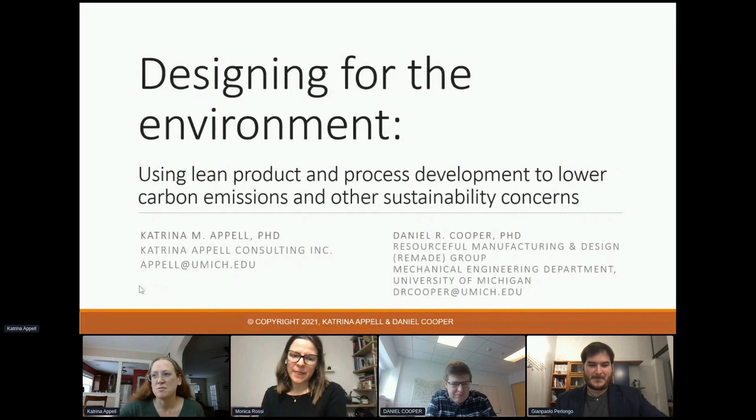To begin, let's look at the role of manufacturing and production when it comes to environmental impacts. So focusing on the biggest global issue of today, climate change and greenhouse gas emissions, these pie charts show the contribution of different sectors to global annual carbon dioxide emissions. The pie chart on the left here shows that emissions can be split roughly one third between buildings, transport, and industry. So a third of emissions coming from making stuff and 2/3 coming from using the stuff, the products that we have made in industry.

Taking that industry segment, which is huge, it's a third of the pie, and expanding it out to the pie chart on the right-hand side, we can see that metal manufacturing, for example, accounts for around 10% of global industry emissions. So that's taking metal material that's already been made and converting it into products. But that pie chart on the right-hand side also shows that over 50% of industry emissions come from making just 5 key materials: steel, cement, paper, plastic, and aluminum. What does this mean for manufacturing? If you could click on, please, Katrina.

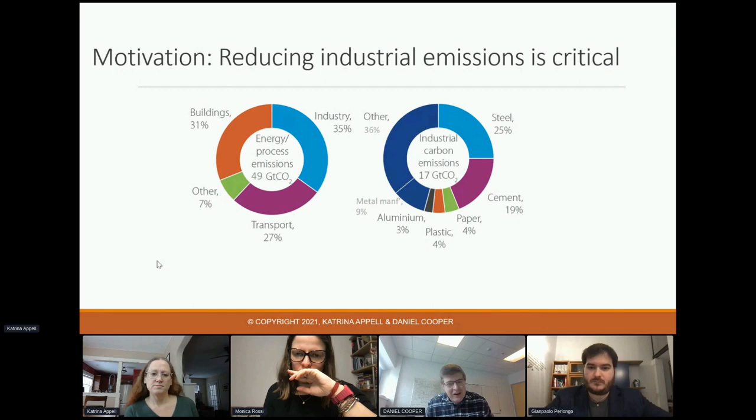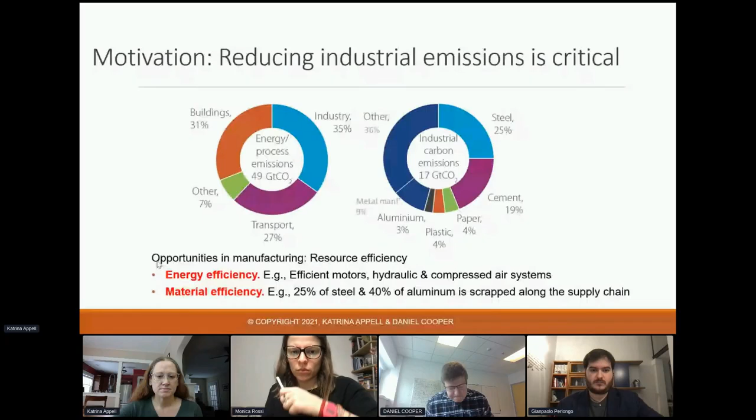Well, there are certainly opportunities to improve energy efficiency in manufacturing, and they are worth pursuing. As we can see, energy in metal manufacturing alone accounts for 10% of industry requirements. But we also need to work on improving our material efficiency. We are already incredibly efficient in how we make these key engineering materials, and we are approaching thermodynamic efficiency limits in many cases. So if we want to drastically cut emissions, we are going to have to get a lot more efficient at how we use the materials that we produce, and there's certainly scope for improvement there. So for example, around 25% of all the steel we make and 40% of all the aluminum we make globally is scrapped along the manufacturing supply chain before reaching a product and ultimately use with a customer. You can click on, please.

So what's the role of engineering design in all this? Well, just as with product lifecycle costs, it is the decisions made during the design stage that have a lasting impact on the energy requirements and emissions released from production, and also the environmental impacts of using and then disposing of the product. So, for example, design determines the potential for component reuse, product remanufacturing, and material recycling at product end of life.

Now, traditionally, it's the use phase, when we are operating the product, for example, driving our car, where most of the emissions and the environmental impacts occur. But the efficiency of many products in that use phase has been improving dramatically in recent years. And that increases both the relative and absolute importance of production and manufacturing emissions, because these use phase efficiency improvements are often bought, if you like, at the expense of more emissions intensive production.

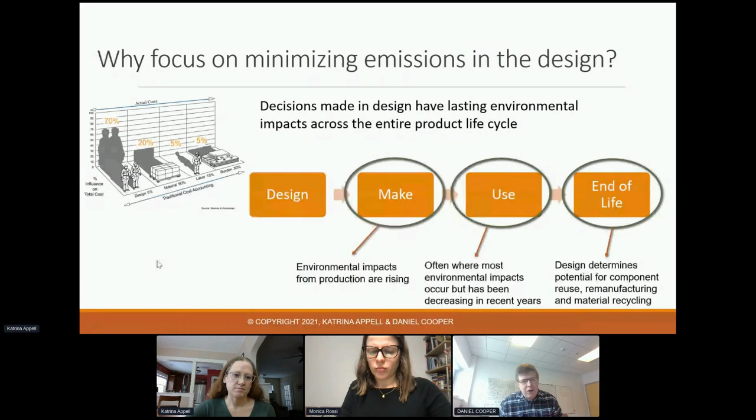So just taking, for example, an electric car or a vehicle with a lightweight aluminum or composite body, that's much more emissions intensive to produce than a traditional mild steel internal combustion engine alternative.

Next slide, please. So designers need to increasingly consider the ramifications of their designs on energy and material efficiency in manufacturing. This is a flowchart adapted from Horton and Allwood, who are focusing on the automotive industry, and highlights that material efficiency is considered to some extent within manufacturing after the product design has already been set. And at that point, there's very limited scope for improvement.

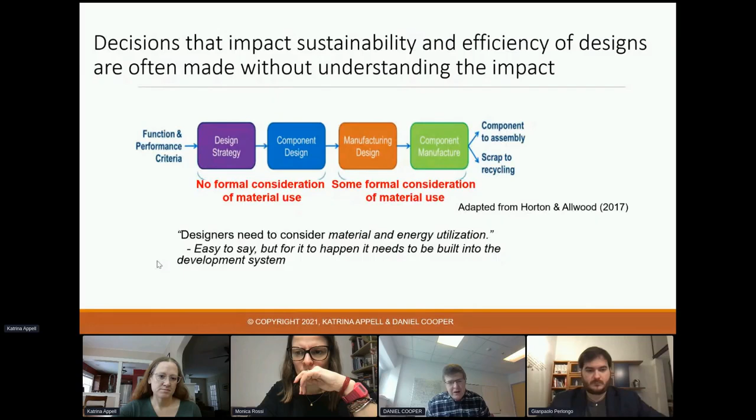But in that design stage, there is actually very little, if any, formal consideration of material efficiency. And this is the same across many different industries, not just automotive. Next slide, please.

So what can we do? Well, there are many eco-design tools available, and many of these are in the form of checklists, life cycle assessment tools, function deployment tools. And most of these tools, though, do not emphasize that important link between design decisions and manufacturing constraints and the environmental impact from manufacturing.

And so in this presentation, we are really going to echo the recommendations of Sutherland et al. in their recent paper on industrial sustainability, and emphasize the need to exercise systems thinking across the product lifecycle to anticipate and avoid creating environmental problems by addressing and eliminating the root cause of these problems at their source.

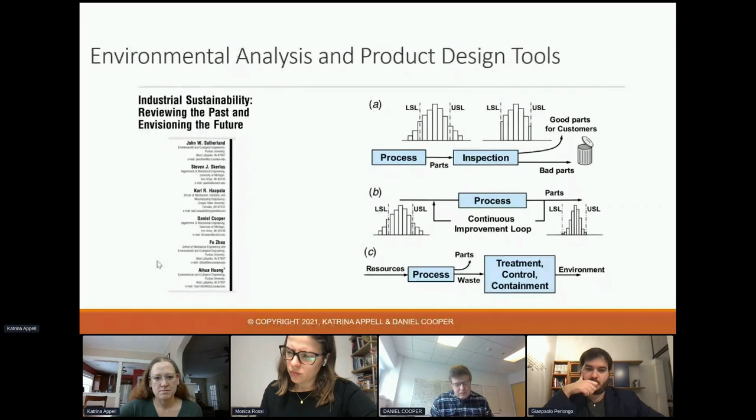And this is really a call to follow the teaching of Edwards Deming with a process control-like approach to modify or replace industrial processes to consume fewer resources and produce fewer wastes. And so building off of that approach of following Deming's teaching, that paper emphasized following one of his principles, but all 14 of his principles really fit together.

And building off of that is where Toyota started a lot of their learning on LPPD. And in the decades of research that have been done on LPPD since, we've now distilled down to these 6 principles that Jim Morgan introduced earlier today. These are the current guiding principles that we're focusing on, that a lot of the research is built to.

And so that really is that focusing on putting people first. It's the people that bring the heart and soul to development, and they're the ones ultimately making the decisions and do all the work to design products and design the manufacturing systems that we want to make as efficient as possible.

Understanding before executing. If we understand upfront what the product needs to be, we can then execute with speed and precision. Also understanding upfront what that total life cycle impact for sustainability is. Too often those decisions are made without understanding fully.

Synchronizing workflow. So if we understand how our work fits together, we can get the right knowledge at the right time to the people making those decisions that are going to impact the ultimate sustainability of the system. Developing products is a team sport. No product is ever developed in isolation. It's a team that works together. And so how can we create the systems and structure to enable teams to be effective working together?

Build in learning and knowledge reuse. So first of all, how can we learn as fast as possible? But then the real competitive advantage is how do we not relearn on every project and capture that knowledge? How do we capture the sustainable methods we're using on this project and use them on future projects?

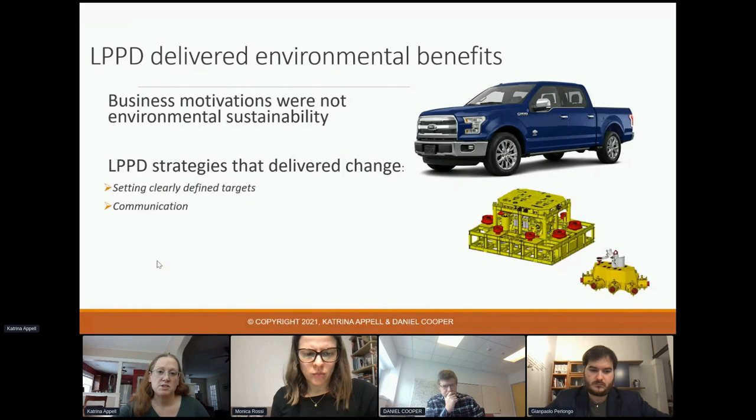And so both of these case examples used LPPD and some of the strategies they used to deliver that change, including setting really clearly defined targets, having really good communication using Obeyas, which was pretty consistent across both organizations, and having very deep collaboration with supply chain. In the case of the F-150, being able to make sure that they could recycle the aluminum in how they've set up the entire system was really key. With the supply chain, both focused on optimal standard architectures. In the case of the F-150, really focusing on that fixed and flexible approach, only really innovating the stuff that the customers would see, but then having a lot of the inner body panels be fixed, with optimal material utilization with the infrastructure.

In the case of the TechnipFMC Subsea 2.0, the entire program was focused around having standard architecture, and so that led to them being able to really focus on making things smaller with better material utilization, really having technical excellence to deliver these engineering challenges, and how they educated people on these principles, and then how they effectively managed trade-offs, because there's always going to be trade-offs. And so what it really comes down to is how do you set yourself up for success early in the project to be able to manage those trade-offs and work effectively together as a team.

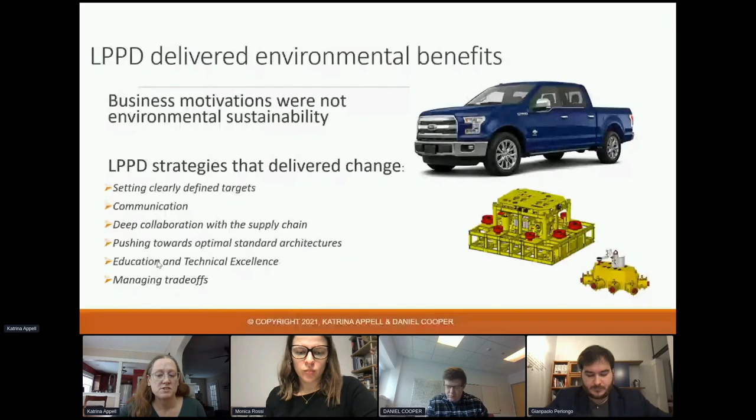So based on these initial case study findings, we hosted a workshop at the AME conference in Chicago two years ago in 2019. And that was attended by around 26 different industry representatives. And after presenting on these case studies, the attendees split up into small groups and answered questions around: what are the environmental impacts in your manufacturing operations? What are the opportunities to improve the environmental impact and improve your bottom line? And how can lean product and process development potentially help to deliver these benefits?

And so what we found in that session is that participants in upstream industry, for example oil and gas and material production, glass manufacturing, identified energy waste and energy efficiency as primary targets for reduced greenhouse gas emissions. So, for example, reduced flaring, and heat recovery from furnaces used in material production. Whereas downstream manufacturers, essentially after the material had already been made, really identified material savings, recycling and remanufacturing as the primary opportunities for significant environmental benefits.

Several of the companies, for example an oil and gas company at the workshop, not TechnipFMC in this case, reported that their projects were unnecessarily bespoke, which perhaps is not immediately intuitive, but because they were unnecessarily customized, it meant that the company actually had very little time to develop optimized energy and material efficiency designs. So there is greater potential for greater standardization and only changing where the greatest value is being provided.

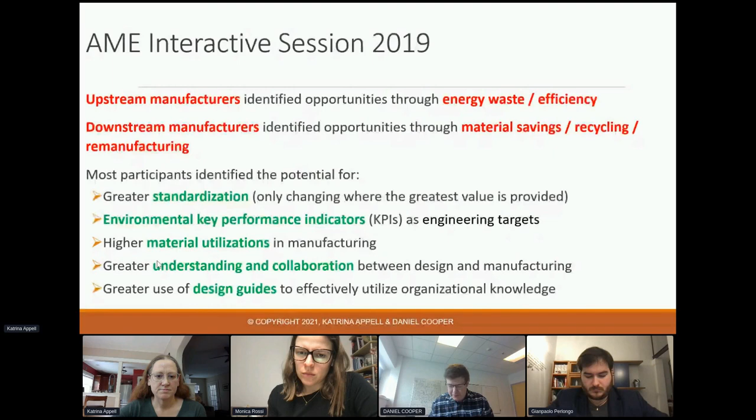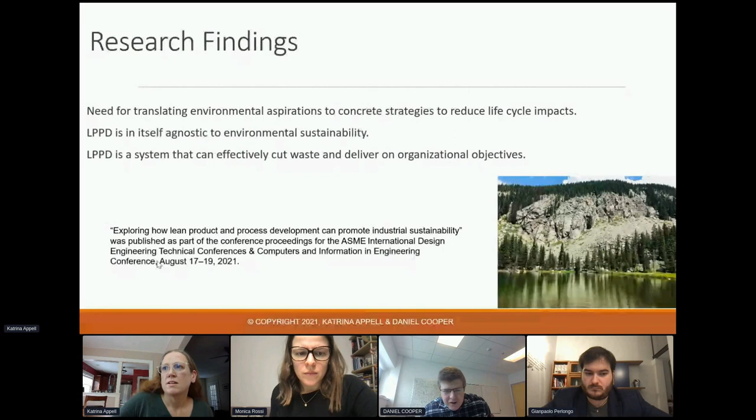Nicola is asking, how could we account or measure the impact on sustainability during the LPPD? How can I then spread it during its useful life? I think, Katrina, is that essentially what you're about to address? I think so. I'd say that this is probably the best slide to answer that question, if I'm understanding the question right, is that you really want to look at the entire life cycle across the product. And so that is across its use phase.

So with the LPPD principles, it's the decisions we make in design that are going to ultimately impact so much of the sustainability across that life cycle. And so that really starts with understanding, with a life cycle assessment, to understand that use phase, understand the end of use, understand the make phase. And then from that, we can use our knowledge of that understanding when we execute the development, being conscious of those impacts and making decisions that have lower emissions or other sustainability concerns.

Upfront in design, because there's so many things that, once the design's been made, it's not easy to go back and change. If you've designed in really high carbon emissions, there are some things you can do to lower it after the fact, but ultimately a lot of those are baked in and you can't reduce them until you redesign the product on the next design. And so really focusing on understanding the impact up front so that you're making decisions that impact across the life cycle.

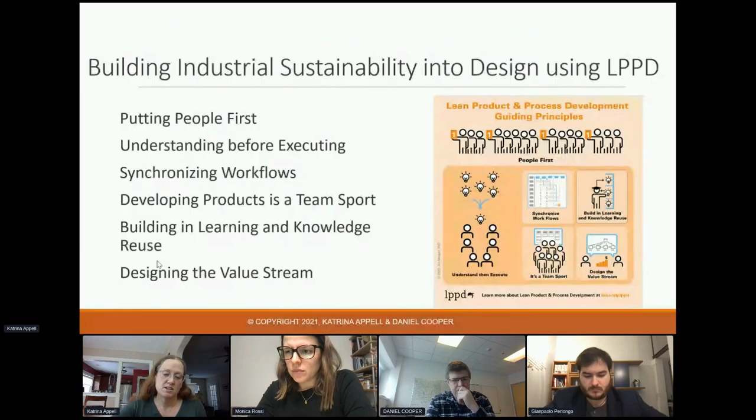Great. Well, I think I'll hand back over to Katrina. I think now you are really going to talk in more detail about how to use LPPD to translate environmental aspirations into strategies. So I'll hand over to you, Katrina. Thank you, Dan. And so just focus on these guiding principles. So there's lots of tools that can be used, as Dan noted, but we really want to focus on looking at LPPD as a holistic system. What are the things that we can do to create the conditions to design for sustainability across that entire life cycle? And we'll fit those tools in as we think about all of these guiding principles.

And so that first one is really putting people first. A key part here is that you get better performance when you put people first. So Daniel Pink summarized decades of research on human behavior and the results. And basically, to get the best performance from people, they need to be intrinsically motivated, which is great because it's also more rewarding for them. So it's a win-win for the individual and for the business. And this is a lot of the intent when we talk about putting people first, we want to create the conditions to enable people to perform their best and be satisfied.

So the three things people need are purpose, autonomy, and mastery. Purpose is really, what is the value of my work? Autonomy is having some control over your work, and mastery is about how you improve your skills. And Lean can deliver on all of these if we're conscious about it. So as we talk about the other principles, and anytime you're thinking about any Lean practice, whether it's to promote sustainability or otherwise, just think about how does that enable people? Because you need to be thinking consciously about the people aspects of any Lean practice or principle and how you're enabling that.

So for the purpose, you can really deliver by helping people see how their work fits together to help the organization. For sustainability experts, creating a system that enables their expertise to get used up front and understood throughout the design and the development is going to help provide purpose to them. Creating the conditions to have that knowledge on how to design things that are more sustainable for everyone on the team is going to be helpful for their purpose.

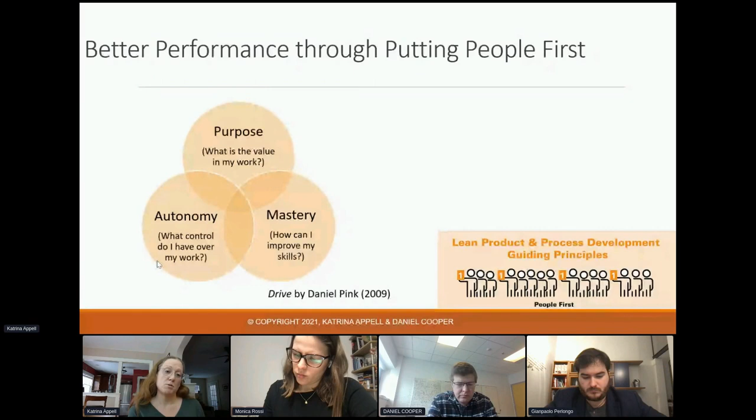And then the understanding before you execute. So some of this is understanding what those impacts are and what the decisions are that have the different sustainability impacts, but then also making sure that as we're defining what the product is, that's done cross-functionally in the study phase of development before we execute, and then capturing that in the concept paper to really deliver as the vision and the aligning document for the development. We just want to make sure that sustainability is part of those upfront conversations.

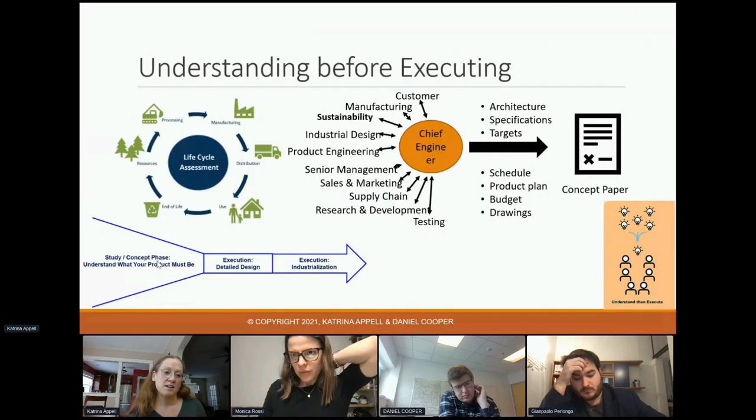There are sustainability experts within a lot of organizations, and they just often aren't involved as early in design as they should be to have the biggest impact. And then from that, once we understand what those decisions are that have the biggest impact, we want to make sure that we synchronize our work and understand that decision flow and who needs to be involved in those decisions and with what knowledge to minimize the carbon footprint or whatever objective you're trying to achieve.

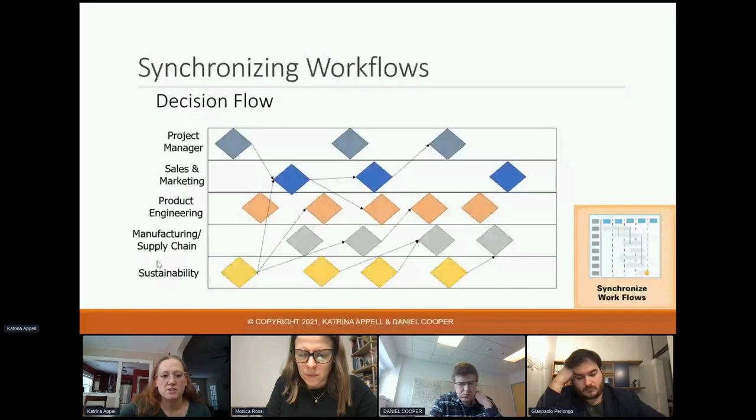How do you make sure that you understand the impact of those decisions, and then get the right people and synchronize their work so that decisions are made consciously, because too many decisions are made unconsciously because we didn't understand the hierarchy and the flow of decisions within our organization. So we really want to bring sustainability into those upfront conversations and get their work aligned. Once that's done, that's really setting the program up. All of that should be up front in that study phase.

And then how can we execute going forward? Development is a team sport. How do we make sure we're creating those conditions using obeya, aligning our work, once we've set our targets, creating our paths to meet those targets through glide paths, and making sure that we're getting aligned and setting those conditions to work together as a team.

And then how do we build in our learning and knowledge reuse? Once we've identified what decisions we need to make for sustainability aspects, how do we make sure that we can learn the information we need as fast as possible? But once we've learned it, how do we build it into our knowledge systems in a way that's usable for future projects so that we're not relearning it going forward? And making sure that in design guides focused on different material aspects, there's sustainability information in there.

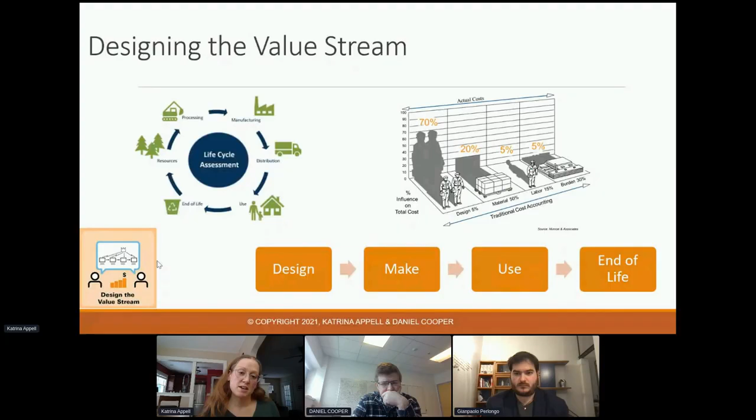And then ultimately it's designing that entire value stream. So we start with that life cycle assessment to understand the impacts of those decisions that are made in design. This graphic here is focused on cost, but the same thing's true for sustainability, in that the upfront decisions you make are going to have an impact on the make phase, the use phase, and end of life, and making sure that we're thinking that through holistically.

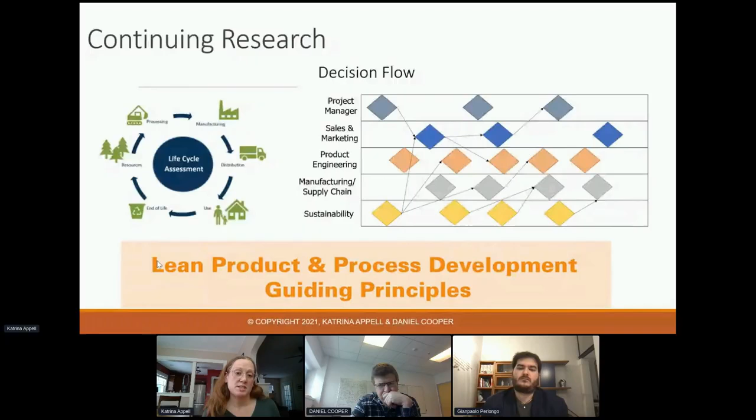And the continuing research we're doing is really focused on that, starting with understanding the impact of our designs on a current design and then laying out those decisions and synchronizing the work, getting the right expertise involved to make the best decisions, and using lean product development guiding principles and practices to enable the team to work together effectively to design sustainable value streams.